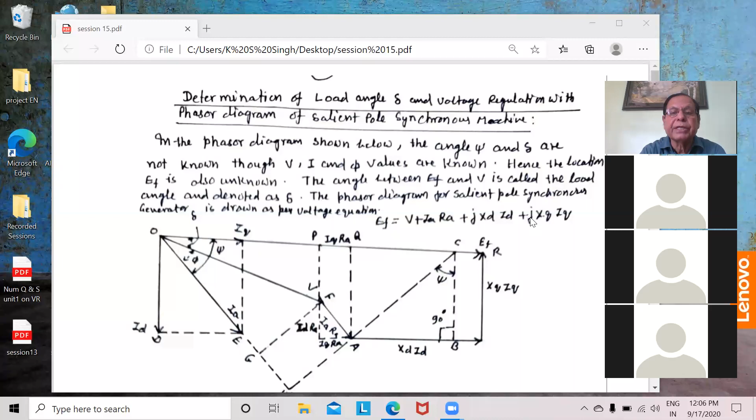So this is the voltage equation which I have derived. In this equation, most of the things are available: terminal voltage V is available, current I is known, and angle phi is also known. So these components of the voltage equation, RA is known, and on the basis of this voltage equation, if you draw the phasor diagram which I have already drawn earlier, this is the phasor diagram.

We take V as reference and draw the current IA. V is taken as reference, and IA, this is the lagging power factor case diagram, that is IA is lagging at angle phi.

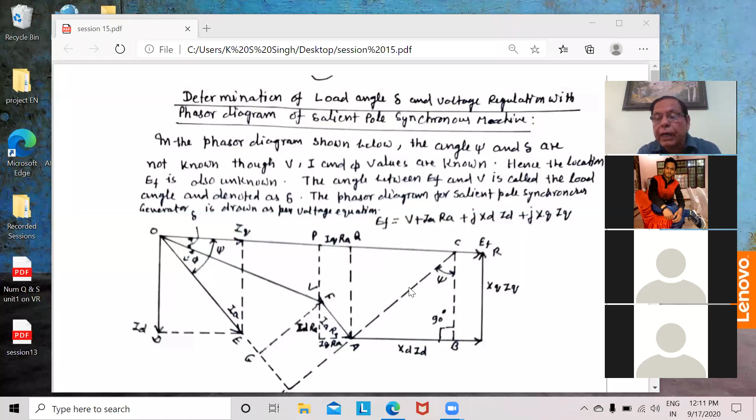In this way we can determine the load angle delta and voltage regulation with the phasor diagram of the salient pole machine. Based on this phasor diagram, you calculate the load angle delta, and then calculate the value of EF with the phasor diagram, and find out the voltage regulation as EF minus V upon V into 100.

So you can find out the voltage regulation on this basis. First you take this phasor diagram, you draw a line, extend IA, draw a perpendicular line from IA which passes through A. This is at 90 degrees to IA, and it will cut OR at point C.

Draw a perpendicular line on IA which passes through point A, and it cuts the OR (EF) line at point C. From point C, you draw a vertical line which cuts XDID at point B.

And similarly, you draw a line from point F perpendicular to the axis, it meets at point G. Now in this phasor diagram, this is IARA. IARA has two components: ID and IQ. So this IARA is divided into two parts: RA ID plus RA IQ.

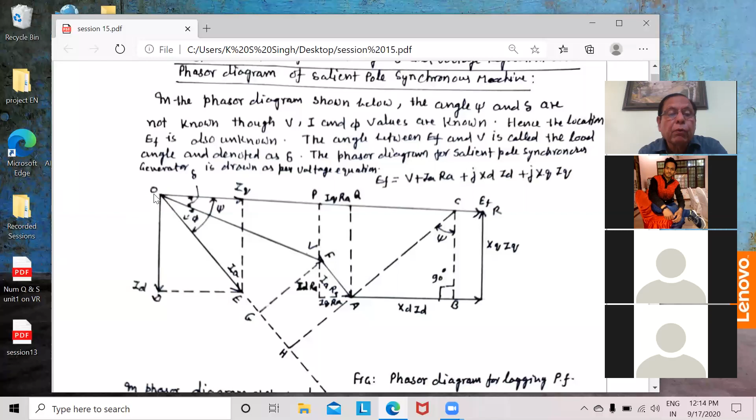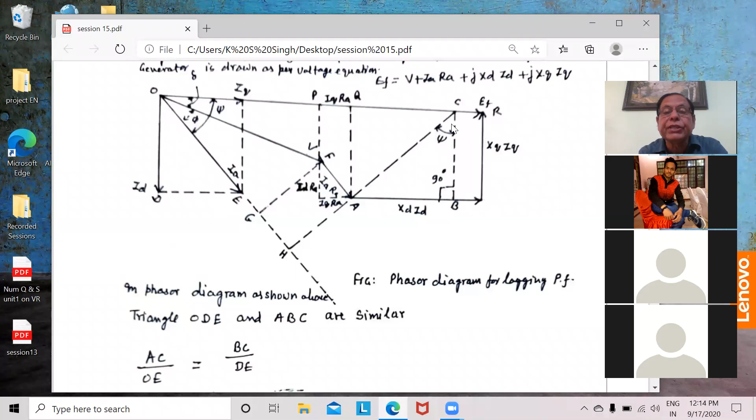Now look at these two triangles, ODE and ACB - they are similar triangles, because this angle is psi and that is psi, with 90 degrees, so this angle will also be equal. So ODE and ABC are similar triangles.

So in the case of similar triangles, you can write: AC upon OE equal to BC upon DE. You can write this because both are similar triangles. Now what is the value of AC? From this equation, AC is equal to BC multiplied by OE divided by DE.

And what is BC equal to? In this equation, what is the value of BC? These two lines are parallel, so this is equal and equal. So BC is equal to XQ IQ. In the place of BC you write XQ IQ.

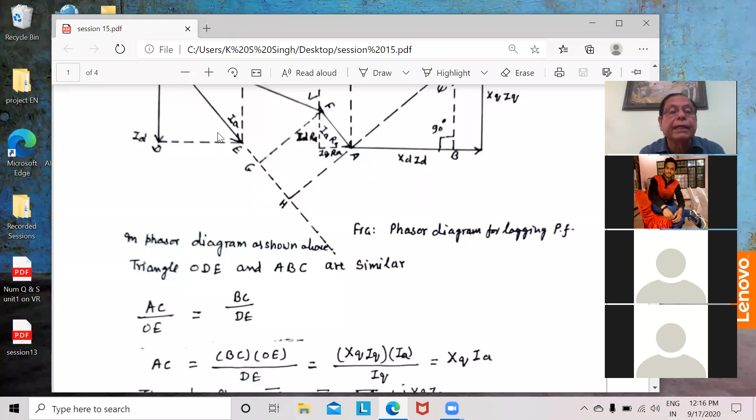And what about OE? OE is equal to IA. In this phasor diagram, if you see, OE is equal to IA. So you write this as XQ IQ IA.

And what about DE? What is the value of DE? If you see, this is equal to IQ. So DE is equal to IQ. You write XQ IQ IA upon IQ - IQ cancels out, and you find the value of AC as XQ IA. This way, AC's value is XQ IA.

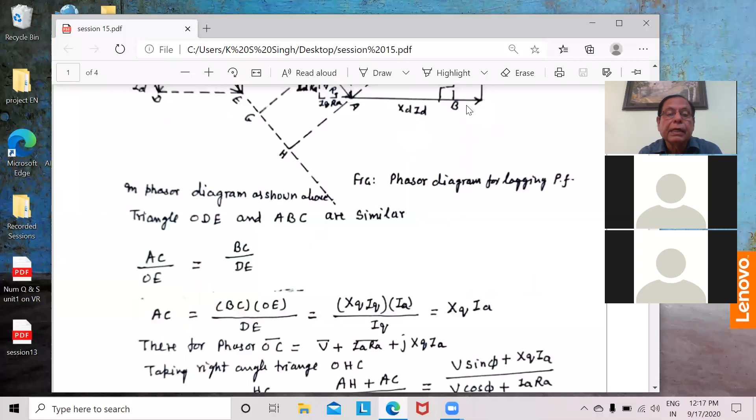You see this OC is equal to the phasor sum of OF plus the phasor sum of FA and phasor sum of AC. So this will be its phasor sum. So this you write as OA, and now you take the triangle OHC.

If we look at OHC, because you can find the value of delta only when you find the value of psi. Psi is the sum of phi plus delta. So what will be the value of delta? Psi minus phi. So first we find the value of psi.

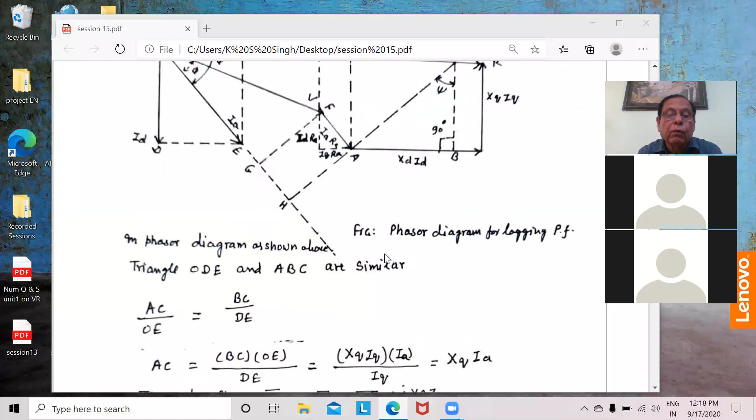Psi's value we will find out first, and that value will be, if you calculate by taking the expressions, you calculate the value of tan psi - what is it equal to? If you see this triangle, tan psi is equal to HC upon OH.

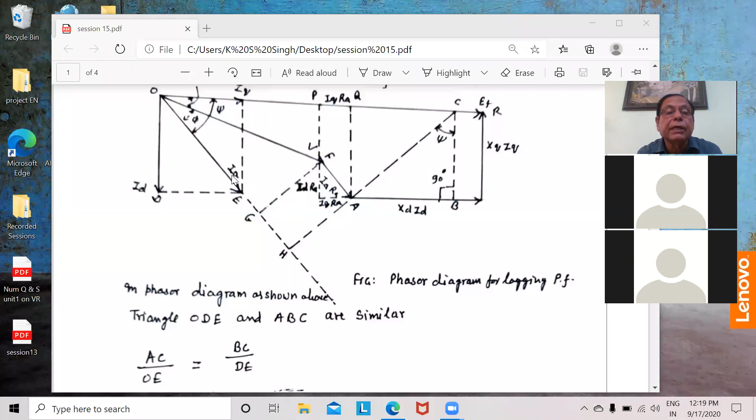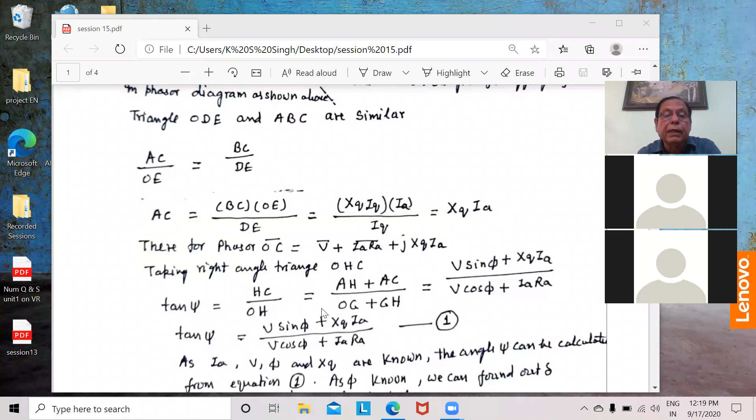That is V sin phi, sorry, V sin phi plus XQ IA. What is AC? XQ IA you have already calculated earlier, that is XQ IA. And what will be the value of OG? OG, if you see, that is OG.

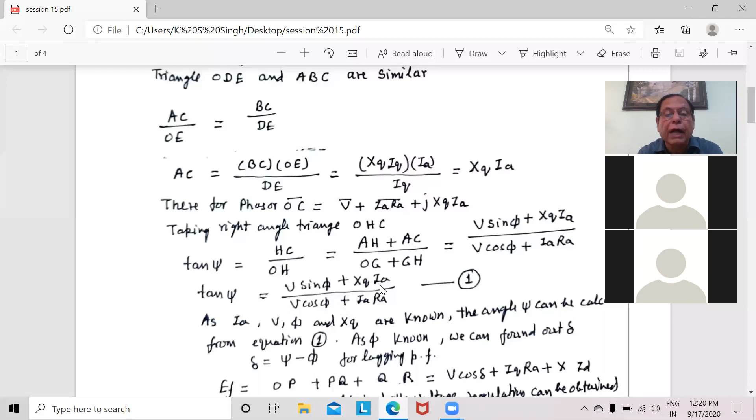We find tan psi is equal to (V sin phi plus IA XQ) upon (V cos phi plus IA RA). As IA, V, phi and XQ are known, the angle psi can be calculated from this equation, क्योंकि ये एंगल ऑलरेडी नोन है, XQ की वैल्यू नोन है, IA की वैल्यू नोन है, phi की वैल्यू नोन है, V नोन है, RA नोन है। तो आप tan psi की वैल्यू कैलकुलेट कर सकते हैं, और psi is equal to tan inverse of this value।

जब psi की वैल्यू आपने कैलकुलेट की, तो psi is equal to phi plus delta। तो डेल्टा की वैल्यू क्या होगी? डेल्टा इज इक्वल टू psi minus phi। इस तरह आप डेल्टा की वैल्यू निकाल सकते हैं। अगर डेल्टा की वैल्यू निकल गई, then how will you find EF?

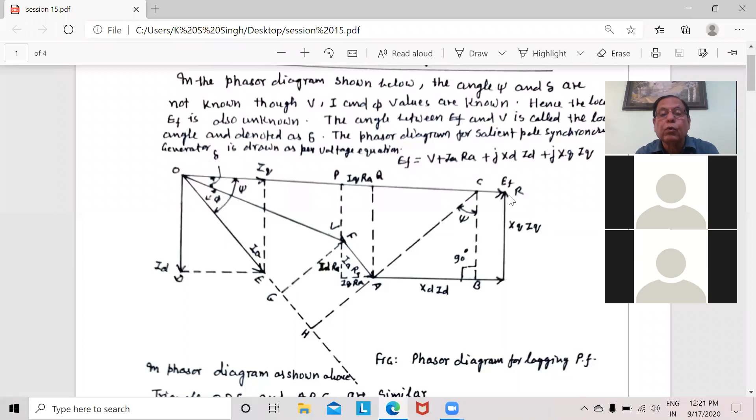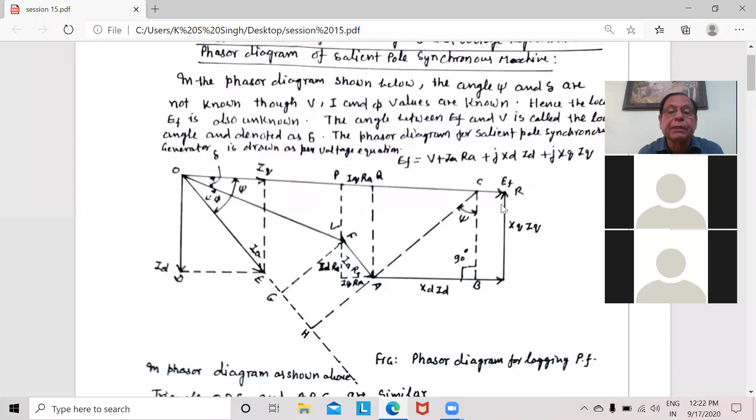You see the diagram, EF कितने के बराबर है? That is EF, that is OR। OR कितने के बराबर है? That is OP plus PQ plus QR। तो अगर EF is equal to OR, that is OP plus PQ plus QR। तो आप देखें OP कितने के बराबर है? This is OP is equal to, अगर आप देखें OP कितने के बराबर होगा?

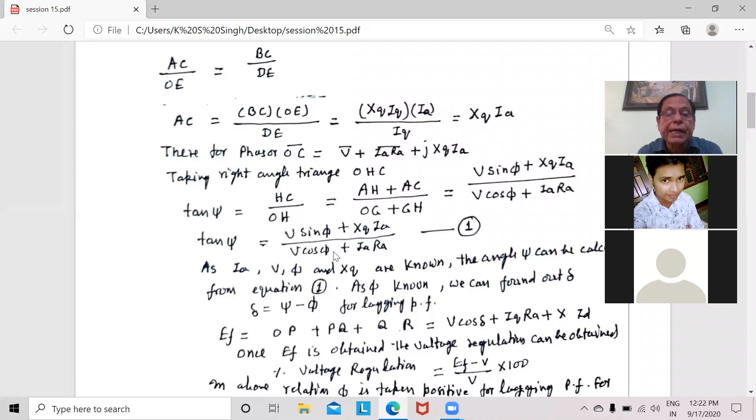That is equal to OP, V cos delta, क्योंकि ये एंगल डेल्टा है। तो OP कितना हुआ? V cos delta। व्हाट अबाउट PQ? ये हमने बताया था, this value is IQ RA। दोनों लाइन पैरेलल और इक्वल हैं, तो PQ की वैल्यू भी IQ RA होगी। अब QR की वैल्यू कितनी है?

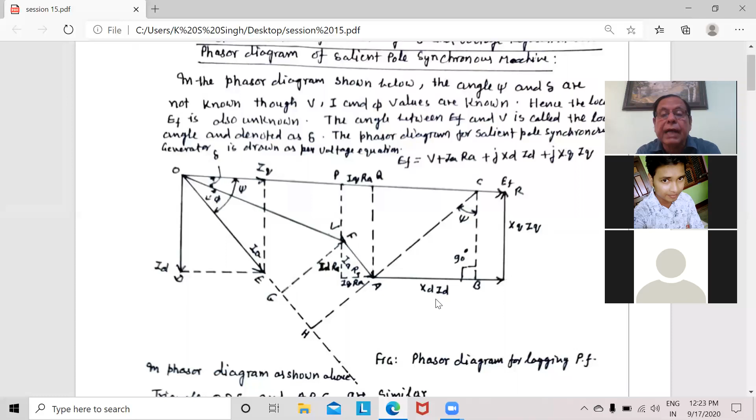That is QR is equal to XD ID। ये दोनों लाइनें बराबर हैं, QR is equal to XD ID। आप ये वैल्यू इस expression में डालते हैं, तो आपको मिलता है V cos delta plus IQ RA plus XQ... यहाँ XD ID है, D यहाँ नहीं लिखा लेकिन यह XD ID है। आप X की जगह XD लिखें। तो this is XD ID।

तो once EF is obtained, जब आपने नो लोड इंड्यूस वोल्टेज फाइंड आउट कर लिया, और लोड वोल्टेज जो फुल लोड वोल्टेज V है, तो परसेंटेज वोल्टेज रेगुलेशन कितना होगा? EF minus V upon V into 100।

इस तरह phasor diagram से, lagging power factor के लिए, आपने EF की वैल्यू, नो लोड वोल्टेज, डेल्टा यानी पावर एंगल कैलकुलेट किया, फिर EF minus V upon V into 100 से सेलिएंट पोल रोटर का वोल्टेज रेगुलेशन कैलकुलेट कर लिया।

इन एबव रिलेशन में phi is taken positive। अगर फाई को हम पॉजिटिव लेते हैं तो वह पॉजिटिव कब होगा, जब पावर फैक्टर लैगिंग पावर फैक्टर होगा। और यह वैल्यू फाई नेगेटिव कब होगी, जब पावर फैक्टर लीडिंग पावर फैक्टर होगा।

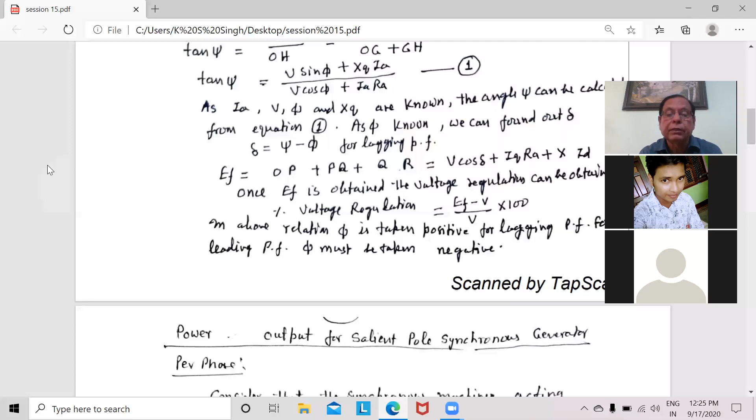Clear? Now we come to how we will calculate the power output for a salient pole synchronous generator। Power output, यानी सेलिएंट पोल सिंक्रोनस जनरेटर से कितना पावर आउटपुट मिल रहा है, उस पावर को कैसे कैलकुलेट करेंगे, अब हम इस अगले topic पर आते हैं, that is power output of salient pole generator।

You see the figure, this figure। A salient pole generator का हमने active power, there are two powers, active and reactive power। तो output power जो हम useful समझते हैं, that is known as real power। उस power को हम output power of the generator कहते हैं।

तो इस आउटपुट के लिए, यह same phasor diagram है, but in this case for calculating the power output we have neglected the armature resistance। आर्मेचर रेजिस्टेंस को हमने यहाँ नेग्लेक्ट करके फेजर डायग्राम ड्रा किया है, इसलिए IaRa नहीं है। You see this phasor diagram।

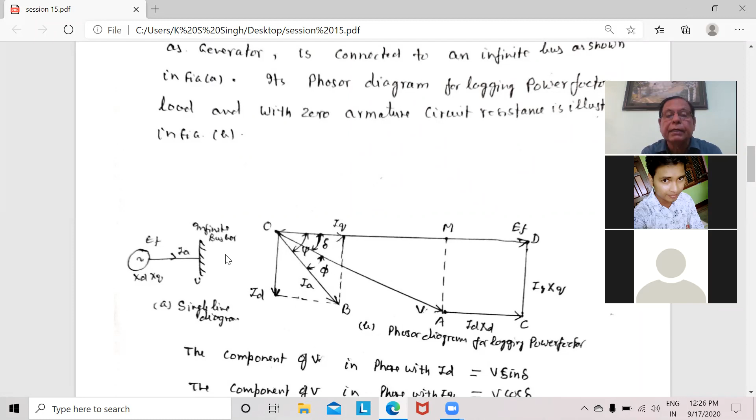Consider that the synchronous machine acting as generator is connected to an infinite bus bar as shown in this figure। This is a generator connected with infinite bus bar, and current IA is flowing in this।

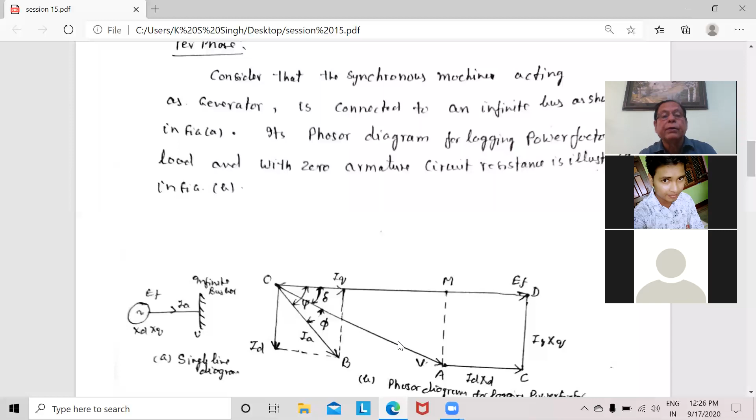Its phasor diagram for lagging power factor load and with zero armature circuit resistance is drawn in this figure. Now V has two components. This IA, you have divided into two components, IQ and ID.

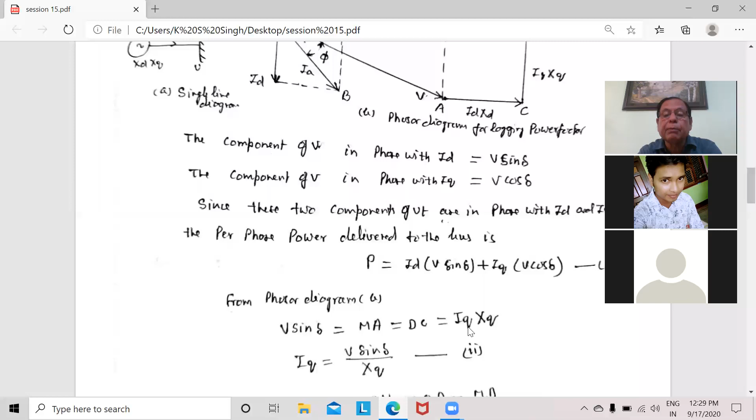What is the value of IQ? From this equation you find IQ is equal to V sin delta upon XQ.

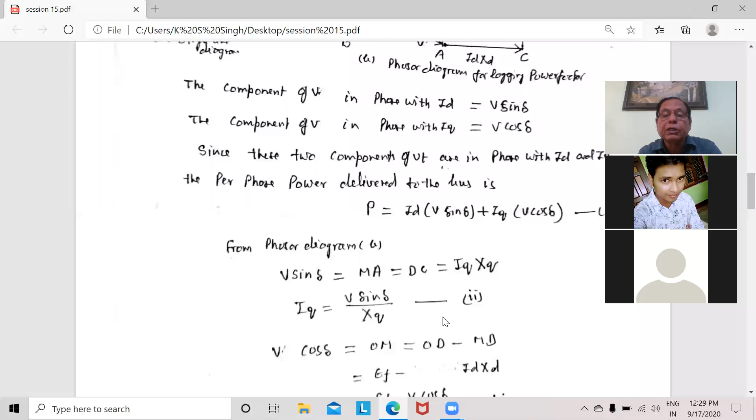Similarly, from the same diagram, V cos delta is equal to OM. OM has two parts, this part and this part. You divide it into two parts, that is OM is equal to OD minus MD. How much is OM? If you subtract MD from OD, you find the value of OM. OD total, this EF, is OD. Subtract MD from this, you find the value of OM.

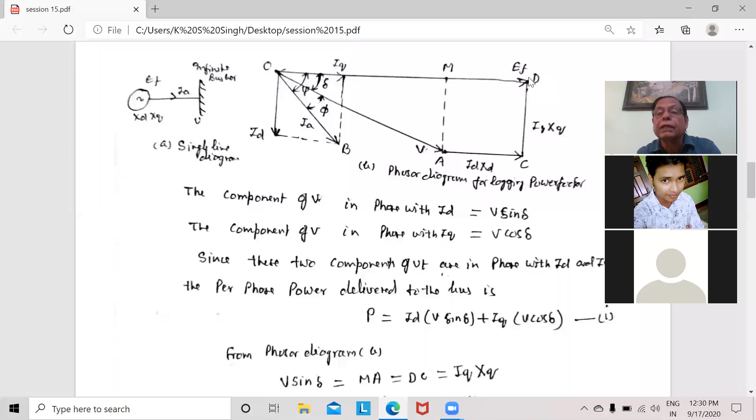So what is the value of OM? You see in this case OM is equal to OD minus MD, where OD is EF, minus MD which is ID XD, because both lines are equal.

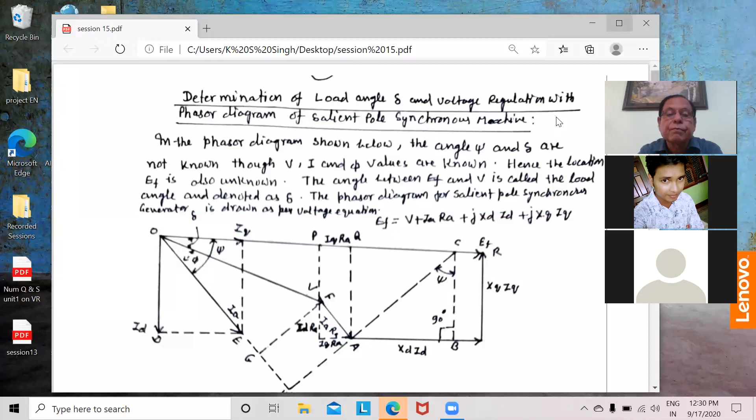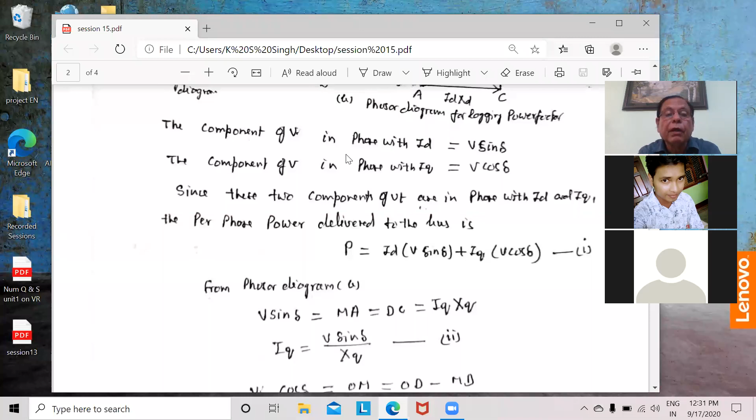So in this way, you put these two values, ID becomes EF minus V cos delta upon XD. If you put the ID and XD value in this equation and simplify it, you find P, the power output, is equal to EF V by XD sin delta plus V square by 2 into (1 by XQ minus 1 by XD) sin 2 delta.

So in this way you can calculate the power output in the case of a salient pole machine. This gives the power output for a salient pole machine.

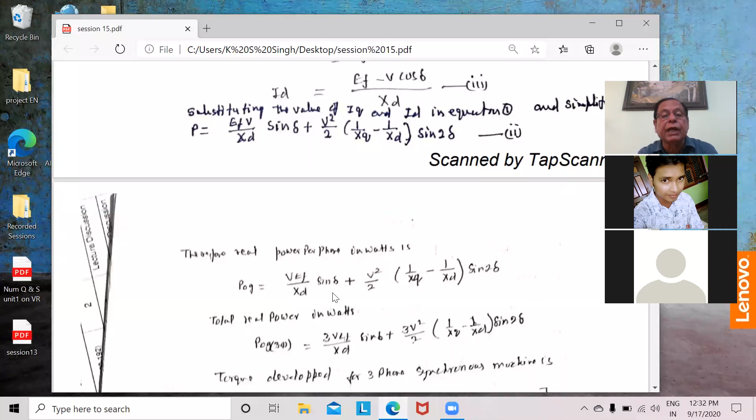Therefore, the real power output - POG, this is called real power output - is equal to EF V by XD sin delta plus V square by 2 into (1 upon XQ minus 1 upon XD) sin 2 delta. This is for single phase.

If you take it for three phase, you find the power: 3 EF V by XD sin delta plus 3 V square by 2, multiplying by 3, you find the three phase total developed power: PG equals 3 EF V by XD sin delta plus 3V square by 2 into (1 by XQ minus 1 by XD) sin 2 delta.

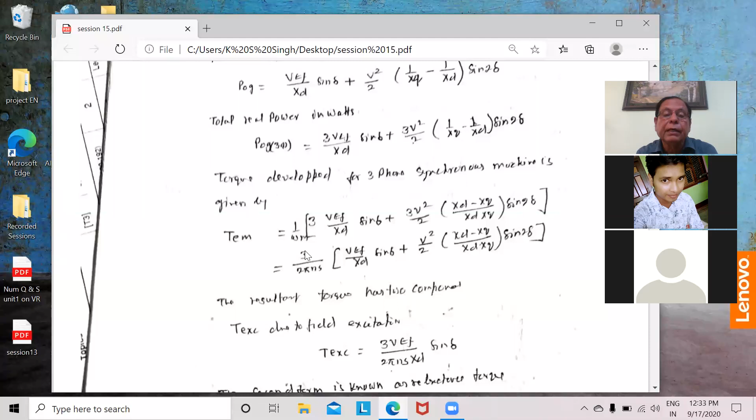So what will be the torque? If we divide the power by omega, the radian velocity, we find the torque. So Tem, the mechanical torque developed, is 1 by omega times the same expression for 3VF, and omega is 2 pi ns, where ns is in RPS, hence written as small ns.

This is the torque equation. In this there are two components. One component is 3/2 pi ns times VF by X sin delta - this is the actual/real power output component, which is equal in the cylindrical rotor case too. But in this case, the second component is the reluctance power - in salient pole machines this is known as the reluctance torque, while the first is the actual torque component.